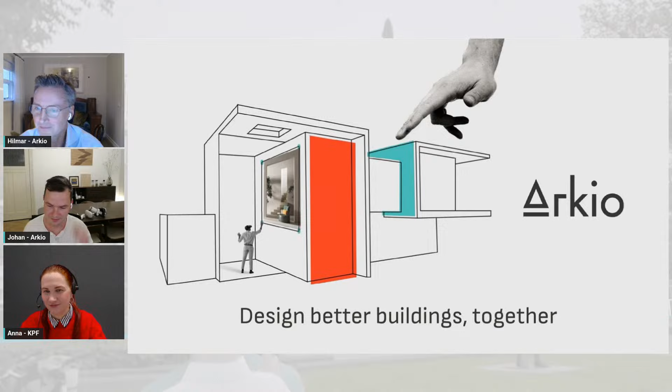Again, we're going to be talking today about some really exciting things, Arkio 2.0, our biggest release yet. Anna will be telling us how KPF is transforming design workflows with Arkio and mixed reality, so she'll have some exciting things to share. Let's wait maybe a few more seconds for more people to join, and then we'll get going.

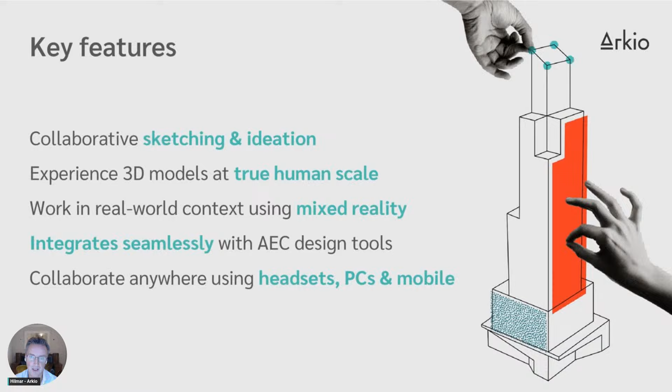The 3 use cases we focus mostly on are design ideation, whether you're sketching like some massing for a new apartment building or just an extension to your house. Design reviews, where you can collaboratively review 3D models and identify issues before they become real problems in the real world. And presentations, internal ones or with clients, when you can guide people around and show them your work.

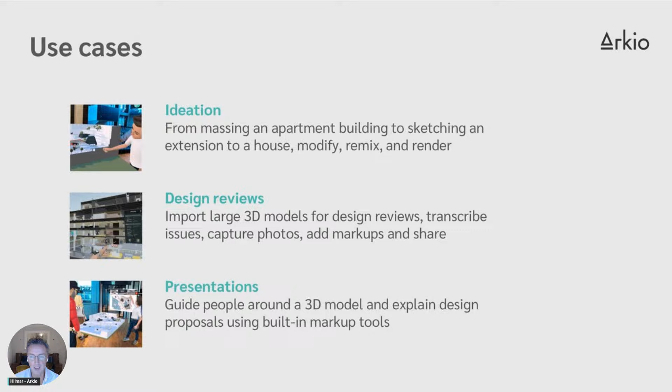Now, the reason why we're building Arkio in the first place is that we think it's super important that people can experience their 3D models, their buildings, before they get built. Instead of identifying things after they get built that could have been better, identifying mistakes that need to be corrected after the fact, and so on. There's no way to experience a 3D model, to experience a building before it gets built, except using VR and XR technologies.

With tools like Arkio, you can also save time and money by having fewer surprises during the design phase and after it. You can make everybody a part of the discussion. Everybody can join. People do not need to spend weeks learning a new tool. It's super easy to be part of the discussion in Arkio.

And what we also do in Arkio is that when you are inside the space, you can both review and ideate and make decisions while you're there together with other people. You don't need to just make notes and then go outside of Arkio and do your edits in another design tool. You can actually do some of the editing and brainstorming inside Arkio itself, which saves also time and money.

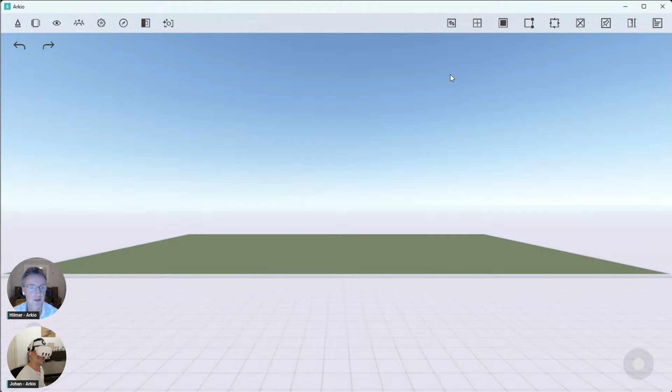There we go. Okay, so as always with live demos, and we say this all the time we do this, anything can go wrong and something probably will, but it's just way more fun to do this live, so that's how we roll.

Now, the first thing I'm going to do here, by the way, this is the PC version of Arkio, and we'll be using the PC application for part of the demo, viewing what Johan is doing in VR through the PC application, and then we'll switch to VR to see Johan's point of view. It's really important to note that everything you can do in Arkio, you can do across all of these applications. So I can be using a headset, or a PC, Mac, iPad, or phone.

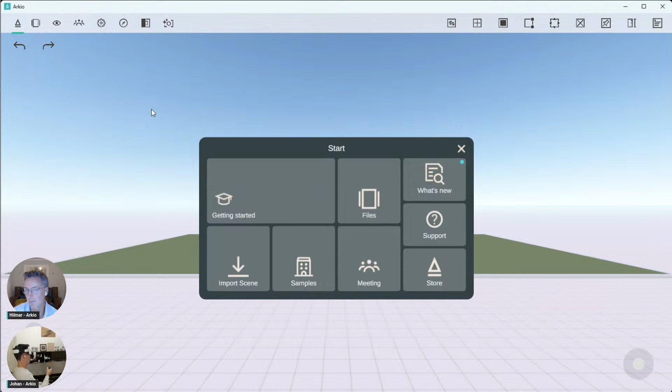Now, the first thing I'm going to do is join Johan's meeting. So are you ready, Johan? Yep. Okay, so let me connect. And there's Johan. So Johan, where are you at? Hello there. Yeah, welcome. So we're currently in Rotterdam.

So what I did here is I loaded the map of Rotterdam and turned on the 3D buildings. This is a feature inside Arkio some of you might be familiar with. You can also import your own 3D models from other design tools and basically make a starting scene. So right now we have a plot over here which we want to make a new tower design. Let me just get started with that.

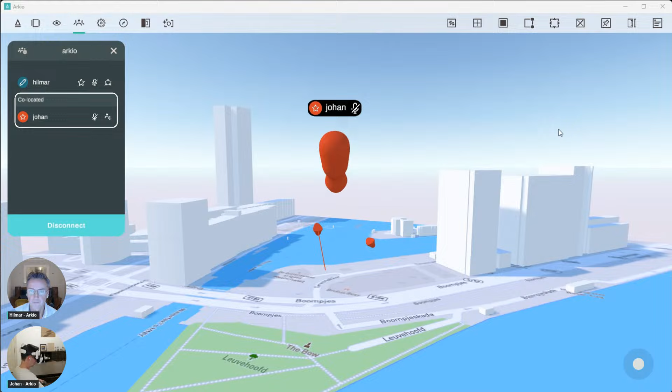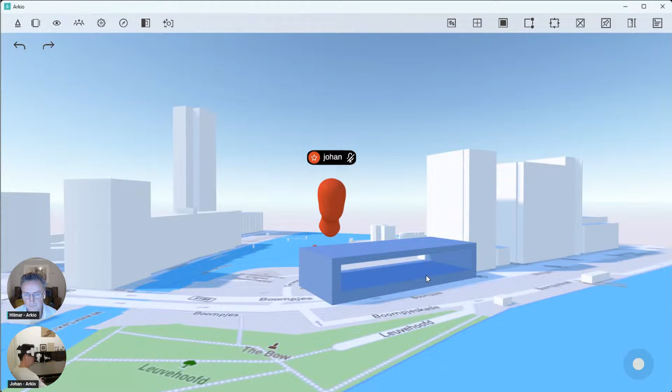I'm just going to make a little volume over here, rotating it a bit, carving, opening a void, and making a little inside place with it. So as Johan is working, I can of course navigate around the scene and look at what he's doing as he's working.

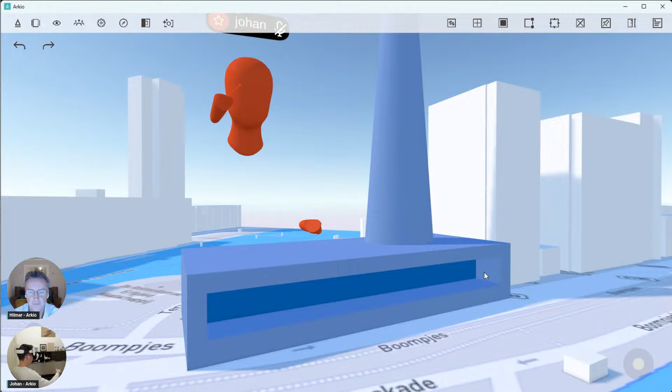So I'm going to be using some of Arkio's new shapes. We added some shapes in 2.0 that give you more design freedom. So let's just add maybe a cone over here, and a cylinder, and maybe some round object instead. What do you think of these towers?

Yeah, I think that looks a bit funky. Maybe let's make something a little more traditional, since we're going to do some kind of hotel building. Okay, let's just throw all this stuff away and go for a more traditional approach, just using some of the volumes.

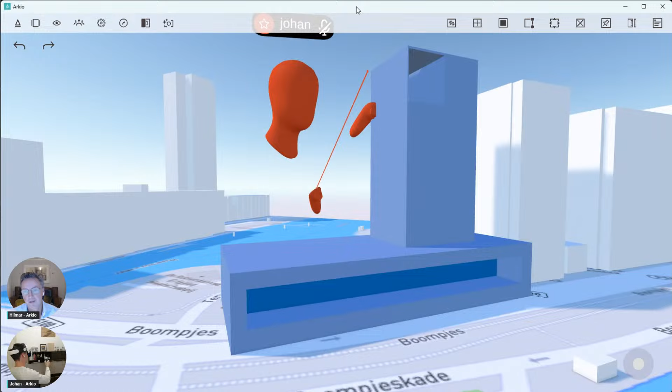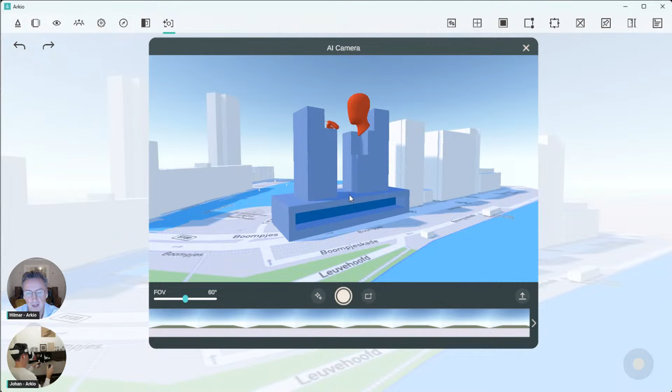So as Johan is working, I'm going to show you the AI rendering capabilities of Arkio. I'm going to open my AI camera, and when I do that, I can frame the shot in any way that I want. I can turn on my AI render settings.

And then you see a few options. So I can choose the render style. It can be a regular render, or sketch, or a model, or a marker drawing. It can be an exterior or interior one. I can select the likeness if I want to create multiple random images and so on.

So I'm going to type a prompt. Let's say modern hotel towers. And I'm going to frame my shot. Maybe let's try this and fire off a few AI image generations.

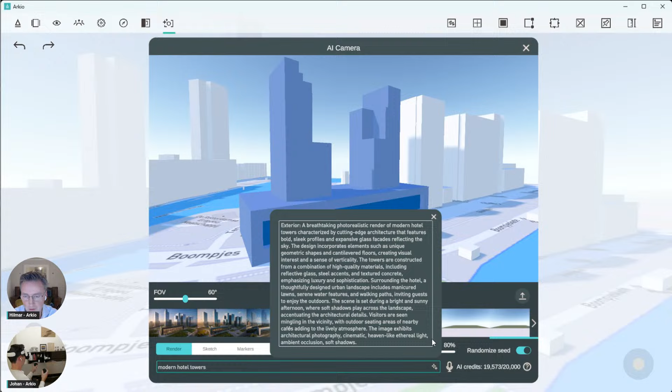Now what's happening is we're taking the prompt I wrote, modern hotel towers, and we have an AI agent working in the background that's enhancing the prompt and coming up with a more detailed prompt, which you can now see here. If I'd like, I can go in and edit this more detailed prompt to make it more specific to what I want to see. And then you can see in the background how the AI renders came back.

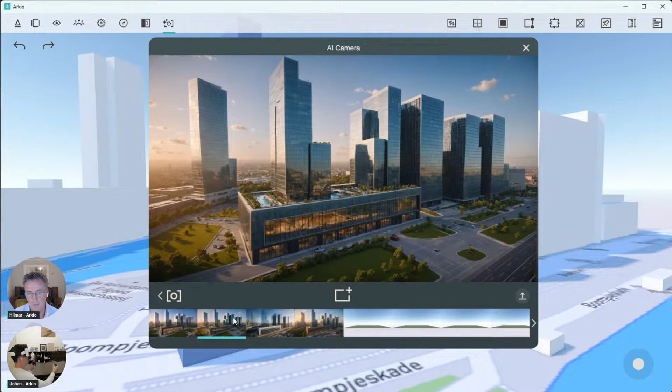So you can get these kind of beautiful AI renders from Arkio, from the PC application, or even from inside VR itself. In this case, we had the likeness set to around 80%. The idea is not to try to create photorealistic renderings of your final scene.

There are other tools to do that. We see the AI rendering capabilities more as a brainstorming and ideation partner that you can use to explore design options, materiality, and so on.

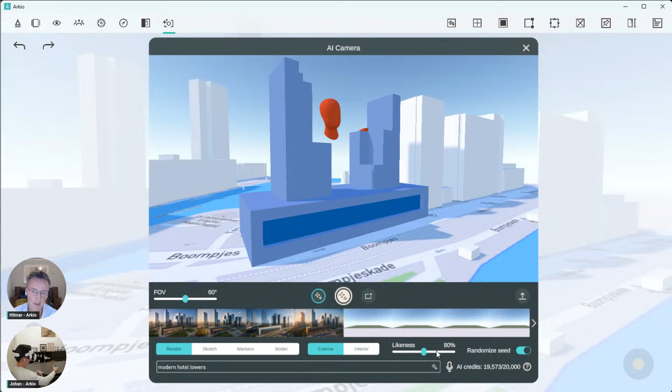Now, the interesting thing about what I have here is I can then take one of these images, and using a new feature which we call frames, I can place it inside the scene itself to share it with other people. Let me just add this frame here.

So now you can see that this render is actually inside the 3D space, and Johan can see the render that I created. I can create multiple of these renders and place them anywhere I want in the scene, and they will all be shared with other people.

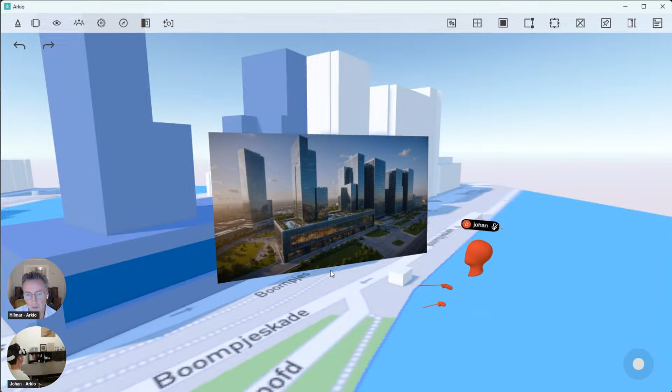So what do you think, Johan? This looks pretty nice. I like the volume that's over here. Let me just sketch something on top of it.

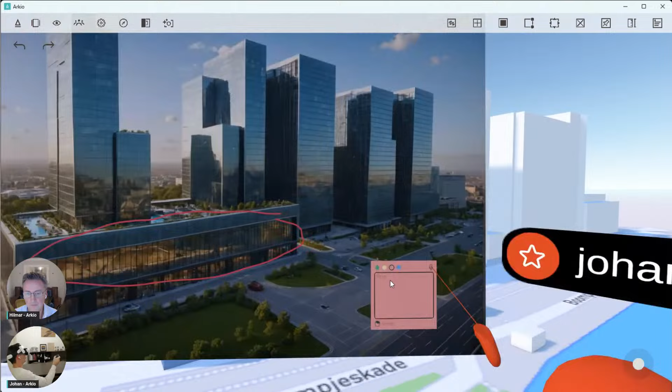Another thing that we added in 2.0 is the ability to transcribe notes. So let me just add a note on this and color it red. Let's use this materiality for these towers. I'm using my voice transcription to add the text to the note.

Later, this voice or these transcriptions can also be exported as issues. We'll talk about that a bit. I'll just assign myself as well to the note.

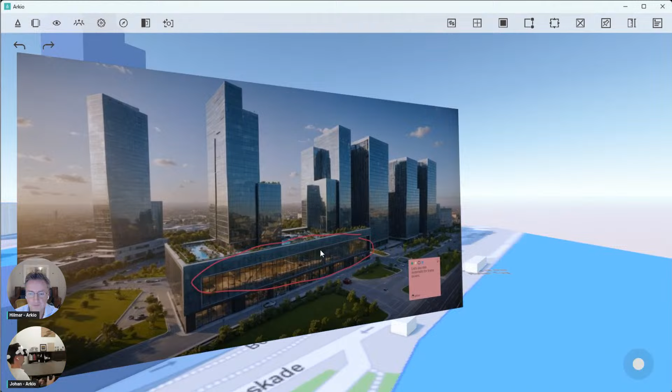Very cool. And I can obviously just navigate around here. I can even say that, well, I don't think this is super important, so let's make it a medium priority note.

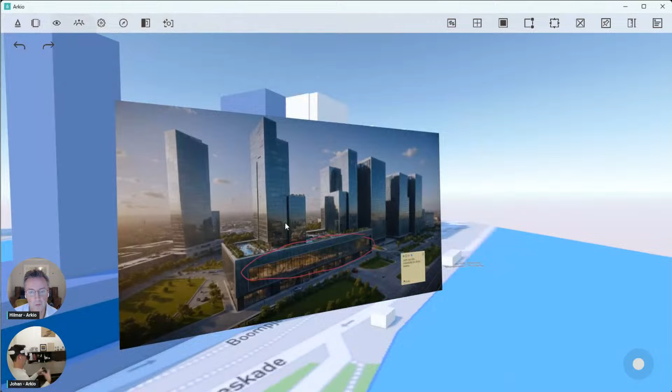But why don't you, Johan, remove this blocky massing and place a real 3D model on the side instead? Let's do that. Let's just throw this one away.

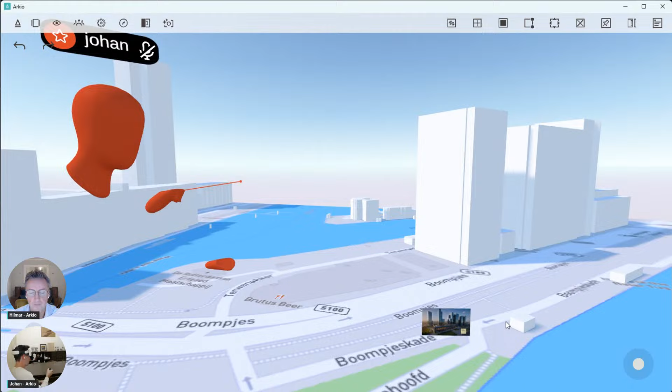I right now have some files prepared, like I have an Archicad file. This is one of the plugins we added in 2.0. This is a pretty big file.

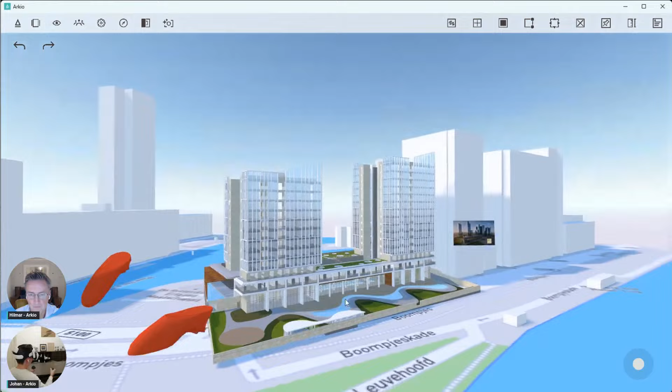And as you can see, I can move it around using my hand. I just pick it up and move it like a physical model, and I'm aligning it to the scene and pinning it in place so it doesn't accidentally move.

I can also load models from Rhino, Revit, SketchUp, Unity, BIM 360, and all the other plugins and file formats that we support. This could be a good base to model on.

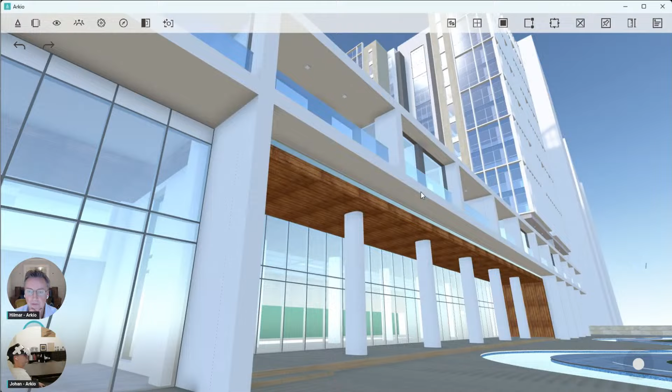Very cool. So let me, for the fun of it, jump here to the ground, maybe create an AI render from here. I'll use the same prompt as before.

So I'll frame it like this and create some AI renders right here. It's going to do the same thing, use the same prompt as before, though I could have changed the prompt if I wanted to.

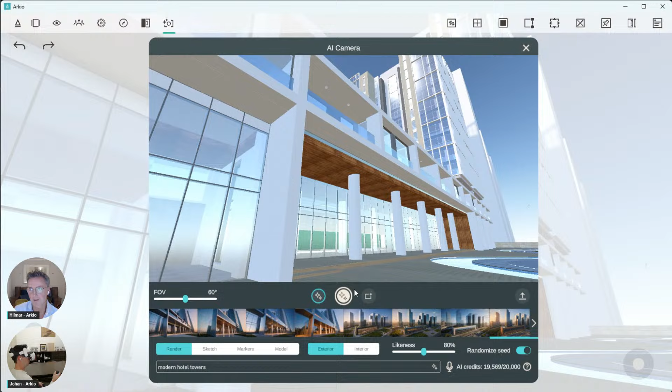I can also, if I see an image that I really like, uncheck the randomize seed button to create different shots from different viewpoints using the same approximate style. So these are some of the images that get created from this viewpoint.

But Johan, what are you up to over here? I'm adding a model that came from our SketchUp plugin, and this model shows that we now support layers.

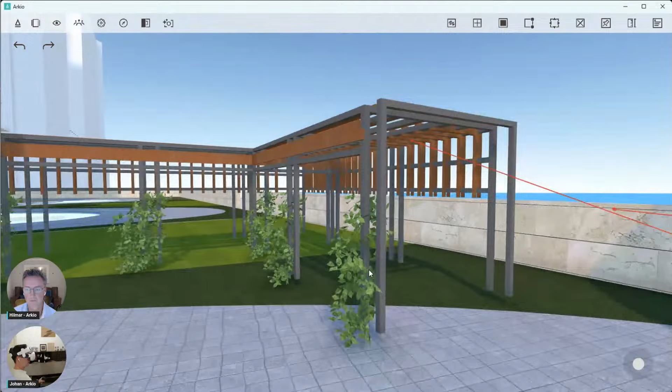Let me just open my layers panel on my end, and I'm going to turn on only one of the options. There's three options I want to show you, Hilmar, like this one, this one, and this one. Which one do you like most?

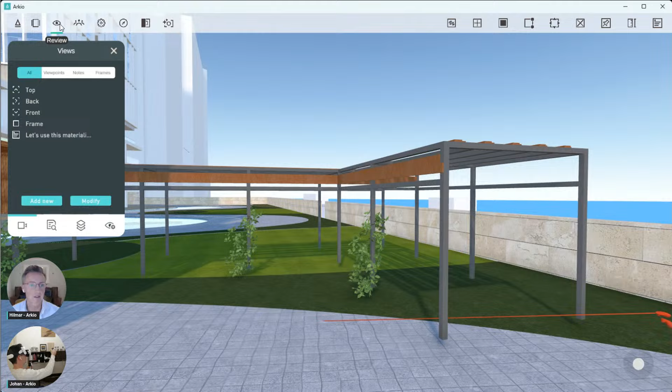Let me see. I'll actually open the layers on my end as well, so I can go into the layer UI, same as Johan has. Here you can see both of the models we have: the Archicad model and the SketchUp one.

Maybe I will turn this one off, and let's use this one here. How about that? It's great. Maybe you can add a note so we don't forget.

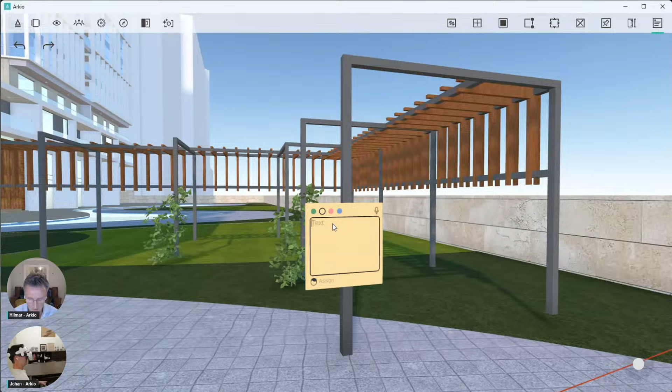Sure, I'll add a note right here. I'll say let's use this one, assign it to myself, and make it low priority.

Very good. So we've shown you a lot of things already: the AI renders, frames, notes with voice dictation, priorities, and ownership.

Layers have been a heavily requested feature. It really opens up the possibility for you to do all kinds of design optioning inside Arkio.

But we're going to switch to Johan's headset view. Are you ready? Yeah, okay, go for it.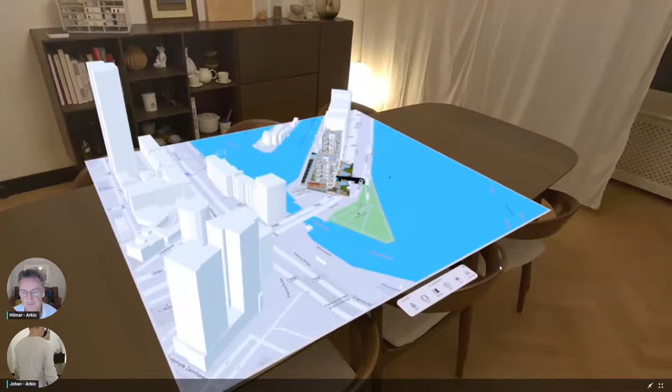So right now we see the model in mixed reality, and mixed reality has the advantage that you can put your 3D models in any location. Right now I put it on top of my table, and if I would be in this space with a couple of other people with headsets, everyone would be able to co-locate and see that model in the same position.

When I look closer at that model, I see that more detail appears, and it is our large rendering technology at work. I can basically move to any side of the model, see little small Hilmar in there already exploring the scene.

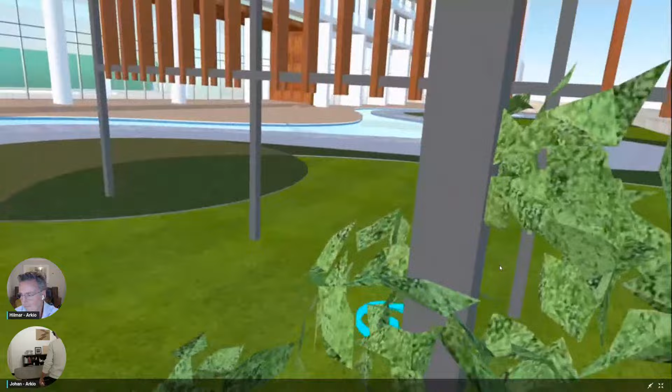If I'm together with other people and I'm co-located, if I jump inside of the model, I can also use that to be fully immersed, and everyone else in that meeting can also be gathered to me using the wristband.

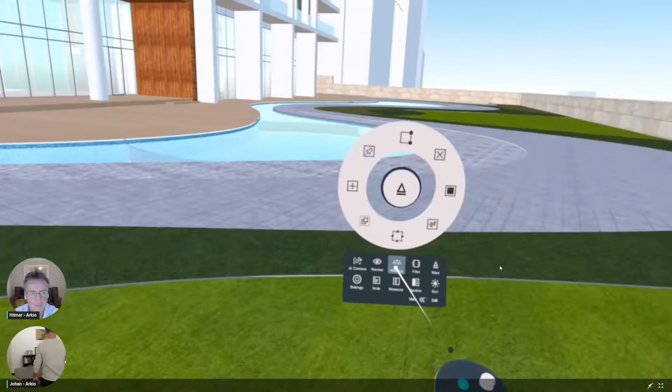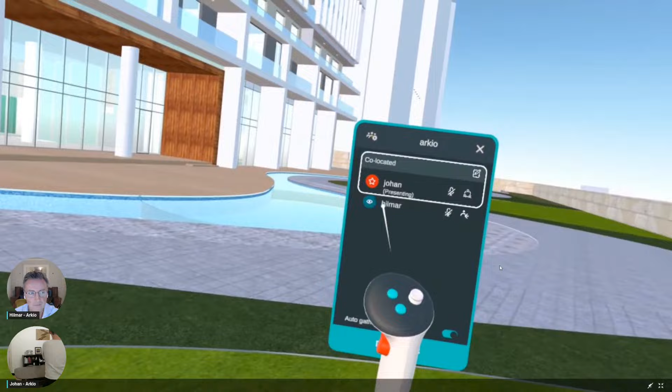I can also use new presentation controls. Right now I'm the host of the meeting, I'm co-located, but we have new presentation controls now where you can turn on presentation mode. This basically mutes all the other users, makes the editors viewers in the meeting, so you can present something, and it auto gathers people as well.

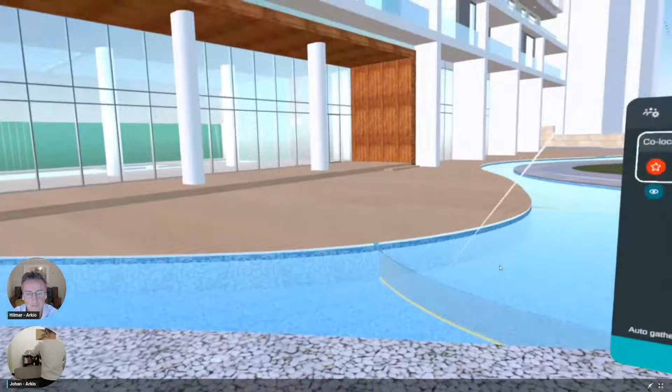This is another setting on your wristband. So if I teleport somewhere and I look behind me, Hilmar actually followed me right there. I can turn the gather position also to be in the front of me.

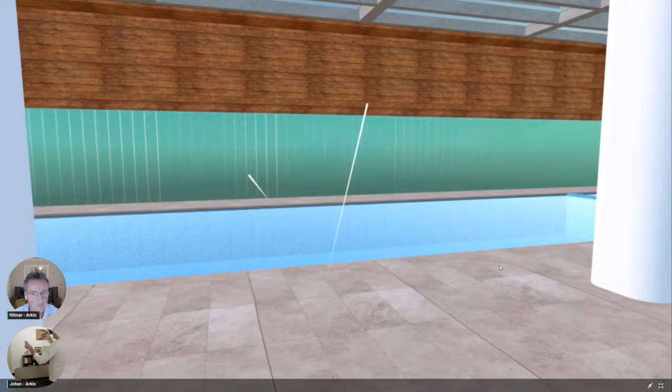So if I go inside here, for example, in the swimming pool, wait a second, Hilmar is appearing right in front of me. If you would be having up to 24 people, you would be all around you, and you can have live presentations through your design.

If I jump back up to the large scale, the model locks in place to that table again, and Hilmar would appear right over there.

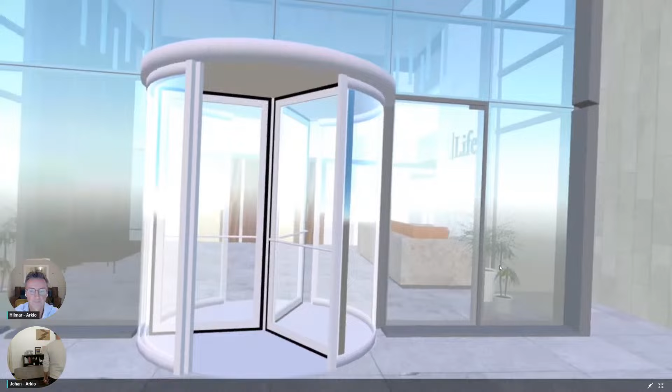Let me just go into this area over here and go into a lobby, all the way here. I'm opening my meeting panel again and turning off the presentation mode so Hilmar can move around freely again and edit.

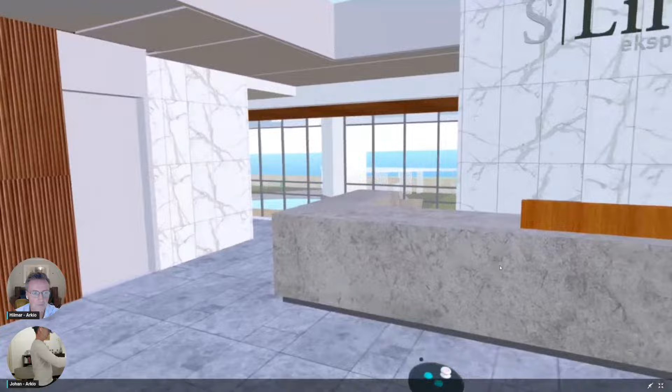So I'm seeing something that is not working that well here, like this reception desk that goes into the space a lot, and it needs a bit more clearance.

So I'm gonna put a note on that reception, make a little note like here. I want to align it to somewhere there. And let's put that note so we don't forget: make reception smaller.

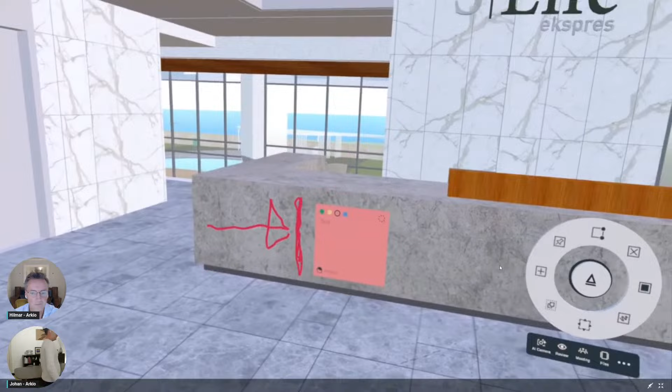As we wait to let it transcribe, that's basically set in here. If I teleport outside and have a look at the model here, this also shows an issue. We have a little niche in the building here that is not used that well.

I'm going to make a screenshot of that one and put it in the scene. So I'll be using the camera mode, and I'm going to be auto-framing the pictures I'm making in the scene. That basically means that whenever I do a snapshot, it directly puts that image in the scene for everyone to see. And me and Hilmar can then see this picture and work on it together.

So if I see, for example, this little thing over here, I want to point that out to Hilmar, and we can discuss this together, again adding a note to make it more obvious what the actual issue is: fill in this clearance in this space. Just making some weird thing up.

This one can also be assigned to someone, so we can just, after we export this out, use this in our other issue management tool.

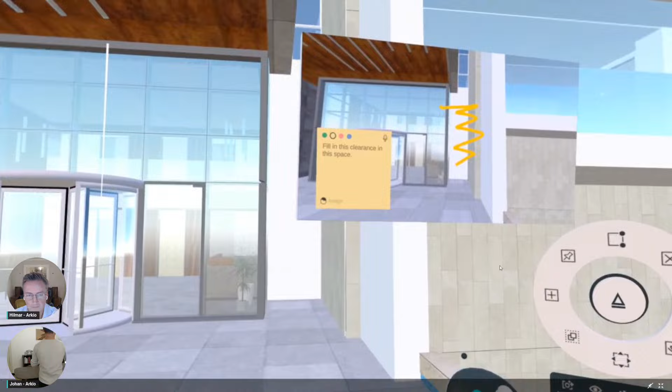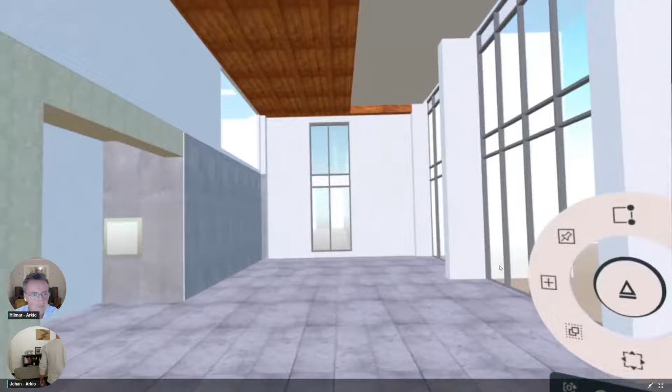There's one more area I want to go to with Hilmar, so I'm just going to teleport there to this big empty lobby, and we have some AI. We let AI generate some of these images already, so I'm just going to be using some of these.

So I have this render that I made, which I prompted using marble and wood. It's basically this space, and I want to put it in the scene for Hilmar and me to look at.

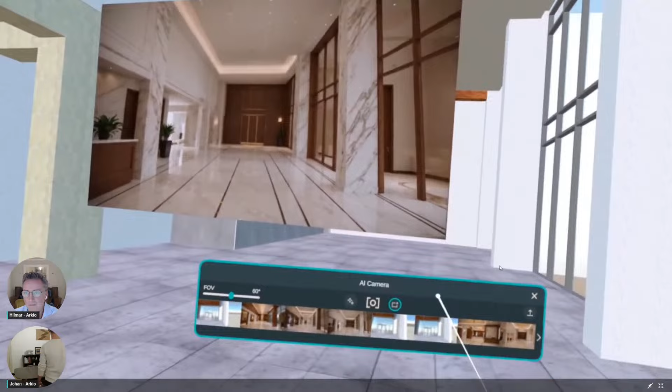What do you think of this materialization, Hilmar? I think it looks pretty cool, but maybe you should add some kind of reception desk over here. I think we should, and I think we should use that material.

So again, I'll add a note: use this materialization, and add a new reception desk. Just assign that one to myself.

And I have an idea for this reception already, so let me just jump right here. So one of the advantages of using VR is that you understand scale and human proportions a lot better. So if I'm making a reception space in a tight place like this, I can really use the advantage of VR to make this space using Arkio's volumes.

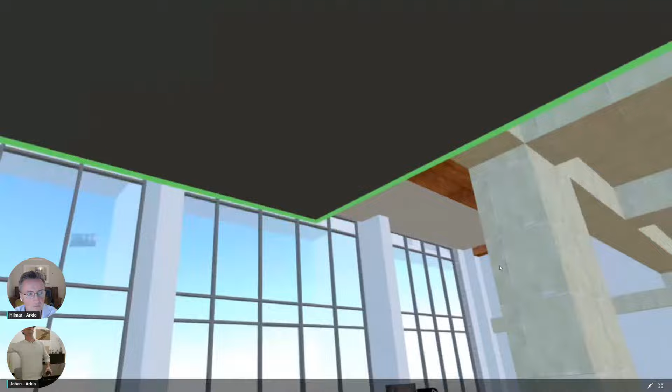Let me just stretch this out a bit. So I'm really feeling like how this would feel to have this reception over here. And if I'm going to add a volume here in the ceiling, I can really feel the scale that it would be like to be in this reception.

If I look back at my design, I can use these volumes and export them back out into Revit or Archicad. I'm going to just add another snapshot of this design. Let me just go through.

Okay, I have something already. Let's just throw that one in the scene. And this then would be visible for Hilmar as well. And we can add a note. Very good.

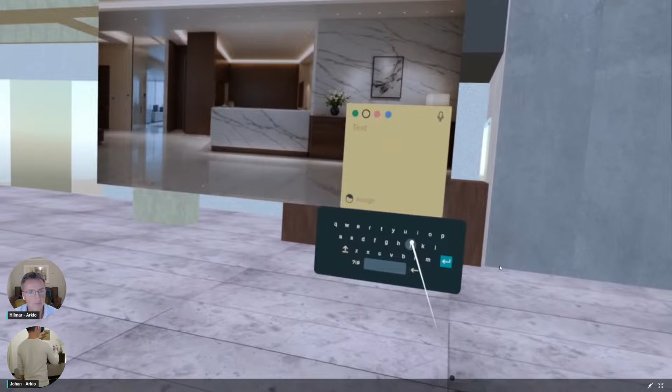Great, thanks, Johan. So yep, let's switch over to my view here again. So I will do that.

Okay, so this is back to the PC client. So here you can see the frame that Johan just added. You can see the note that he created. I can go and change, obviously, all of these things as well.

Now, so far we've been working together in a meeting. But one of the advantages of Arkio is that you don't have to be connected to the cloud to do any of this. So I already have on my device, I have these models, I have all of these frames and these issues. So I'm just going to disconnect from the meeting. Everything still works for me.

So this means that if you do need to do any kind of a demo, whether it's with a PC or with a headset in a place where you have spotty connectivity, you can still do that as long as you kind of load your models beforehand.

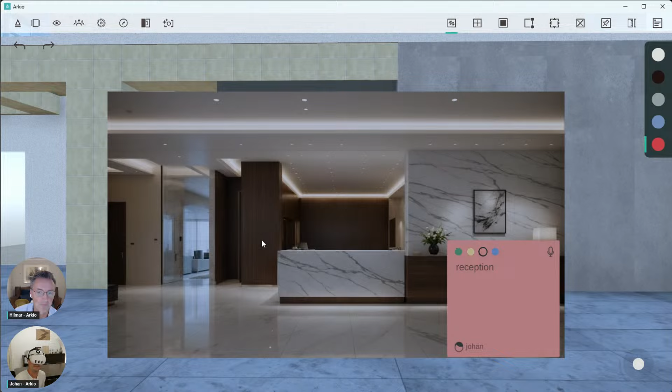Now, since we're here in the PC application, I wanted to show you a few things in general, what we've done in 2.0 with the non-VR applications, as we call them. So we made changes across all of the apps we have across PC, Mac, tablet, and phone. We have a new tool ribbon here at the very top. We've kind of simplified and cleaned up the look of the app.

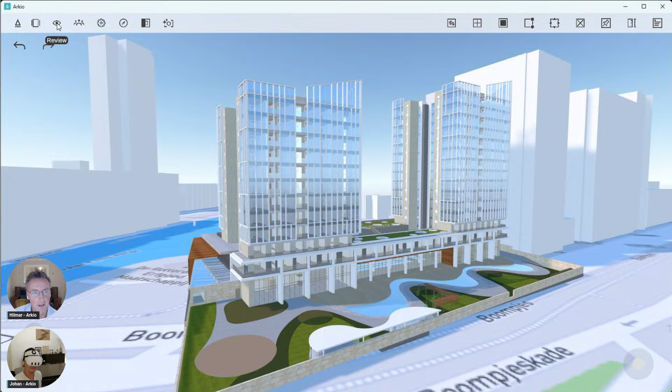And if I go into my review UI, you can see here that I have in a single place all of my viewpoints, all of the notes that have been created, and all of the frames that have been created. I can also go into a view showing only the notes that I have, and I can start to jump through them. So here are the ones that we created before.

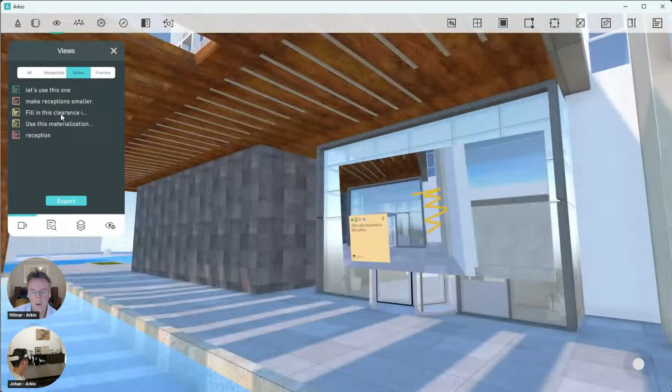So make the reception smaller, fill in this clearance, use this materialization, and then there's the reception. And you can see if I start to modify this, let's say I want to make this a medium priority, it changes here in the list as well. If I change the text, it changes the text as well.

Anybody that joins me in the scene, whether that's in a meeting or if I share the scene with other people, they'll be able to see all of these same things. And the same goes with the frames. I can jump to the frames and I can see them in front of me.

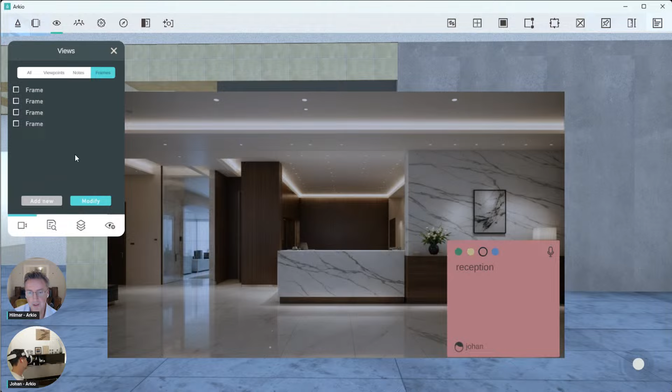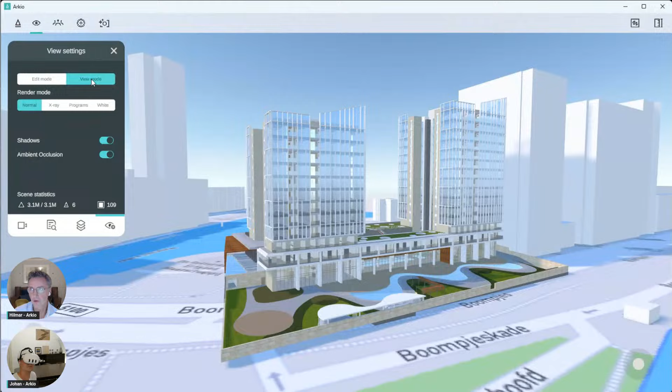Now, there are other things that are interesting to note in this review panel if I go into my review settings. So first of all, we have a new feature in Arkio where you can go between edit and view mode. So with view mode, you can toggle that to make sure that nothing can happen to the scene itself.

It basically removes the tools so you can hand your headset or your device to somebody without being at risk of them modifying the scene. Now, I can also turn on other things like shadows on and off, ambient occlusion. We had different rendering modes.

What's also interesting here in this view is you can see in the statistics from the scene that this scene has 3 million triangles. Now, a device like the Quest typically should only be able to render 1 million triangles. But with Arkio, you can go up to 20 or even more, 20 million triangles. And if you have multiple models like this, 3, 4, 5, 6 million triangles, you can even combine multiple models in one single scene, and we still render it for you.

So let's actually go back to Johan briefly to see what he's up to.

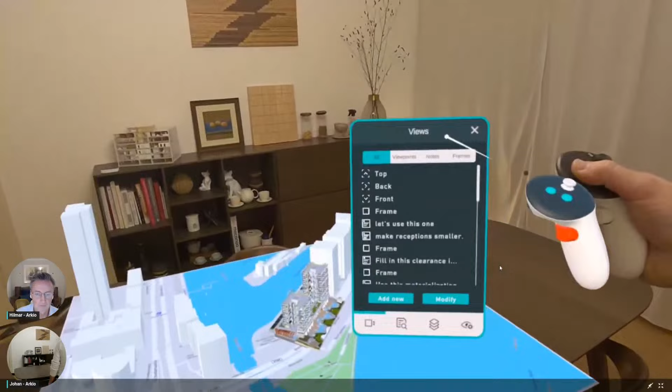Okay, so I have the same overview that Hilmar just showed, going through the different notes here to get a sense that we can go to these meetings together. So if you prepared something in single user, you can just do this together, or send someone an Arkio file.

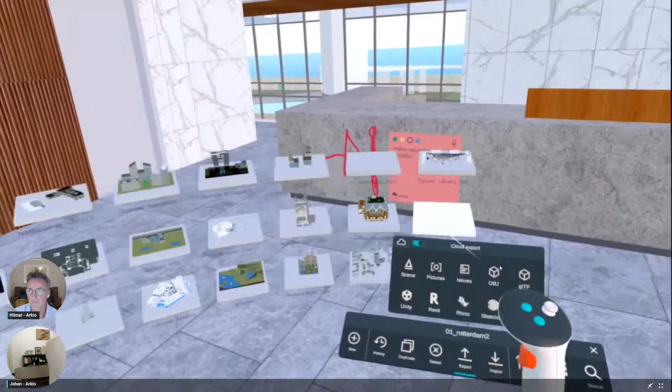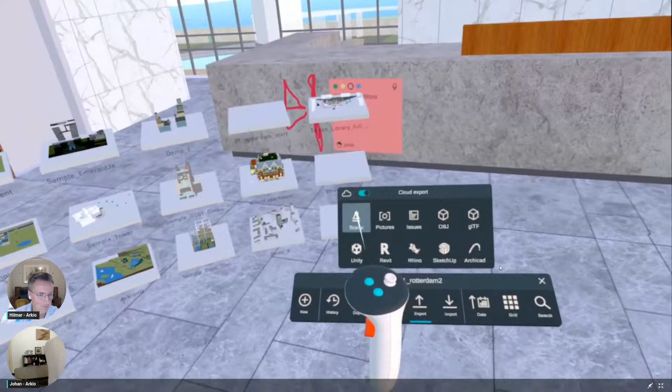You can export your issues from this panel, which will open the new file browser of Arkio 2.0. This file browser shows all of the models you have available locally, and it shows my export settings and that I'm connected to the Arkio cloud. With the cloud enabled, I can export everything to the cloud, which is our central hub to connect all your devices together, getting downloads from your PC and uploads from plugins to the headset.

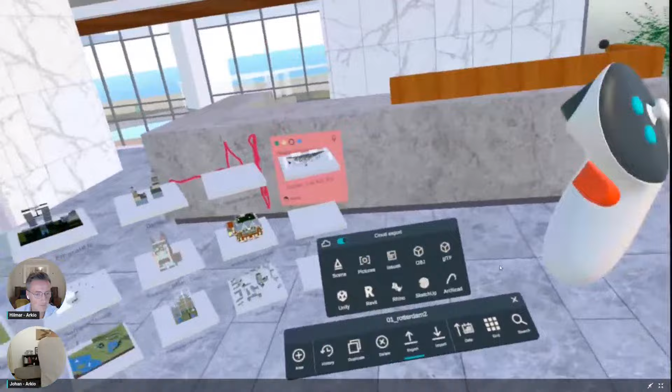Right now I'm in this space, and I'm going to export this scene so Hilmar is able to show it on the PC. We're no longer in the meeting, by the way, so this can be a good way to show or share things with people without having an Arkio meeting. I can also export the issues themselves.

This will make a screenshot of the notes and also include the text that we put in the notes, the priority, and all of the metadata.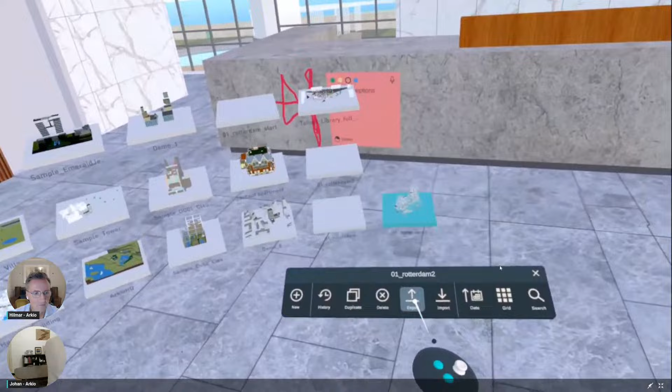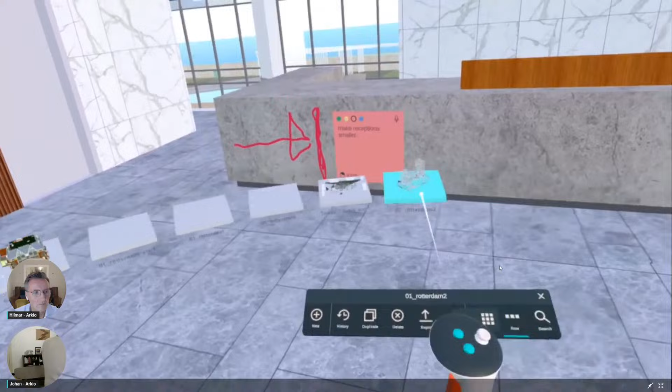The file browser itself got a really big overhaul for 2.0, and now we have much more models that we can show. We show previews of the imported geometries in your models, and you can switch between row mode, basically the old way of going through scenes, and grid mode, which allows a lot of scenes. You can also search files.

So using that, for example, I have a school project in here. I just type the characters I need, and it will filter out the models in your scene. I think this is a good time to go back to you, Hilmar.

Sure, so we're going to end with showing the Arkio Cloud portal. To access it, you can simply go to our website, arkio.is, and there's a cloud button in the top right corner.

The cloud, like Johan said, is a great way for you to manage your imports and exports in terms of 3D models, scenes, or issues. It's really simple to create a group, and when you have a group, you can connect all of your devices to that single group, so everything flows between these devices automatically.

Johan just exported the issues, so we're going to go into the issues list. Here we have the list of issues we just created, all the notes we added together with images. It shows the description, the assignment, priority, and when this got created. This I can share with anybody.

So if I copy this URL for the issues list, I'm just going to paste this into the event chat. You can even try for yourself, open a new browser and try to open that URL, and you'll see the same issues. And the same goes for the scenes.

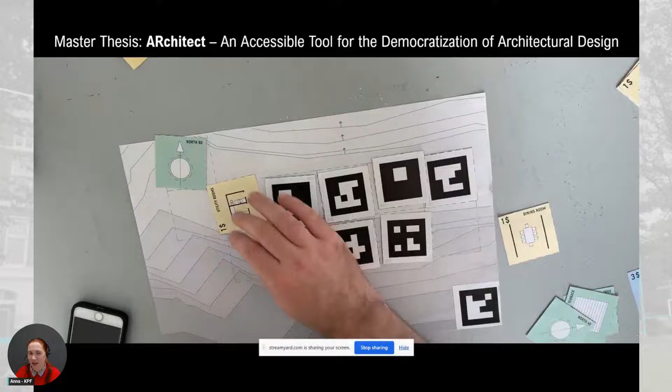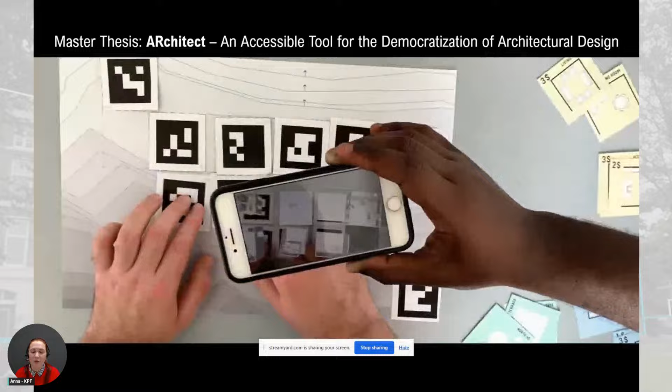So the project called ARchitect is a multisensory game that explores the educational potential of learning games and their impact on user engagement in the co-design of homes. Architect uses augmented reality as part of the game to convert play cards, as you can see on the screen, and the play cards have Aruco codes on the back side, into 3D models in real time. In my concept, it was meant to have design evaluation integrated. By encouraging learning through play, the game offers an alternative approach to design education, empowering non-experts to shape their future urban environments on a micro scale.

So after graduating, I received an offer from KPF New York. After one year, I transitioned to the London office, where I moved from a designer role to a visualization specialist. I work on a variety of initiatives, including educating architects on real-time rendering software, implementing a variety of workflows, and promoting AI workflows in architectural practice.

I also conduct research in extended reality for architecture, which is my personal passion.

KPF is a global architecture firm recognized for our innovative, sustainable design solutions. At KPF, we believe in the power of architecture to transform cities. We do this through crafted details, through attention to context, and of course through innovations. Our diverse team delivers projects that shape skylines and enrich communities spanning commercial, residential, cultural, and civic sectors.

With the project One North Quay, I have always been eager to find unique applications for mixed reality and collaborative features that Arkio provides. This project, One North Quay in Canary Wharf, London, became the ideal case study. The innovative design of the building itself introduces a new approach to life sciences by creating a vertical lab campus rather than typical low-rise buildings. Currently in the construction phase, the project is expected to be completed by July 2028.

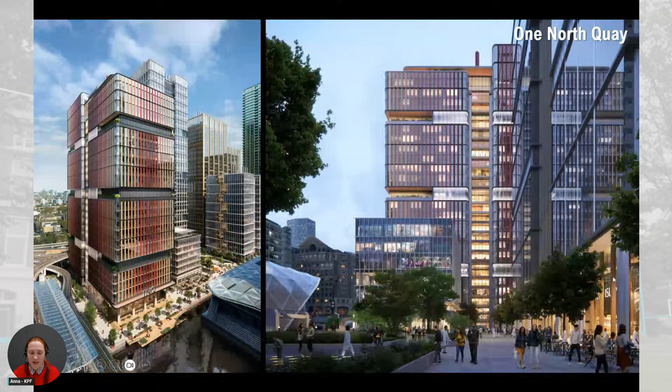The tower presented a unique challenge for our mixed reality case study, not only because of its impressive size, it's 136 meters and 23 floors, and its prime location, but also due to the complexity of the Revit model, which requires extensive optimization to run smoothly on a mobile device, especially in the MetaQuest headset.

However, the workflow with Arkio is quite straightforward. I began by identifying the best locations around the construction site to preview the model in mixed reality, ultimately selecting two spots, DLR Poplar Station and West India Quay. Both are elevated, which required me to use the context models of the stations and surrounding buildings to accurately position the North Quay project on the site.

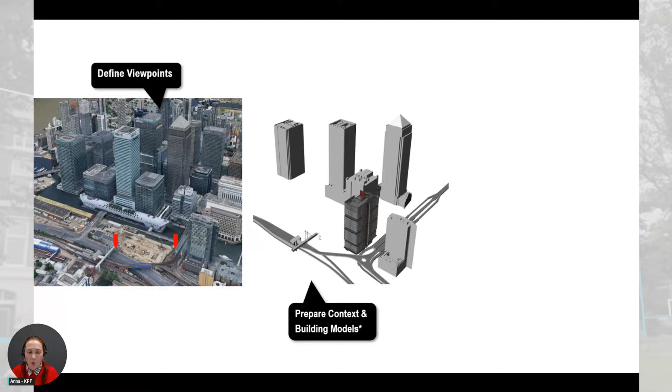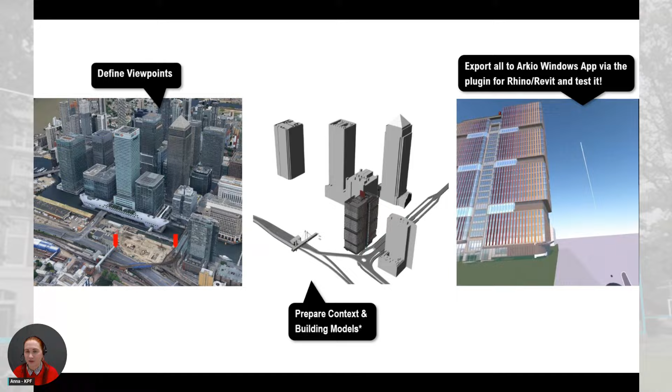Once the models were placed and materials assigned, I exported everything to the Arkio environment directly from Revit with a single click. Don't forget to preload your model onto the headset, open it and test how the building appears from both viewpoints in advance, just to protect yourself from going back and forth from site visits.

You can use Arkio with or without Wi-Fi, as the headset will store the most recently updated model for easy access when needed. On site, you should physically position yourself in alignment with both the context model and the actual environment. After launching Arkio, you adjust your location in mixed reality, apply pass-through, and align context buildings with their real-world twins, let's say. Once aligned, you can apply a transparent material to fully immerse yourself in the experience.

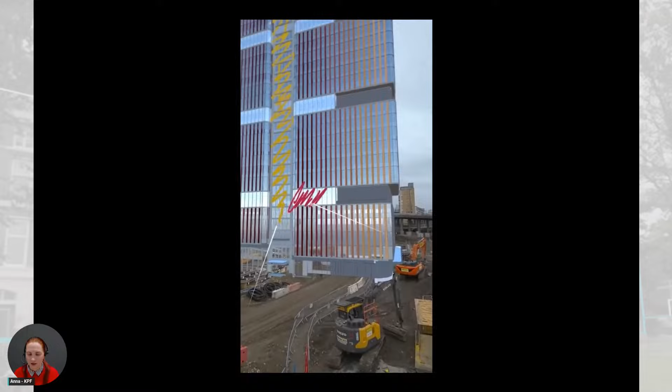While reviewing the building, you can make changes in real time, record video, or collaborate with your colleagues. For example, I tested the XR Sketching Pen by MX Ink Logitech, and it allowed me to use a familiar tool to mark up the project and make a variety of adjustments, from changing textures to adding new building elements.

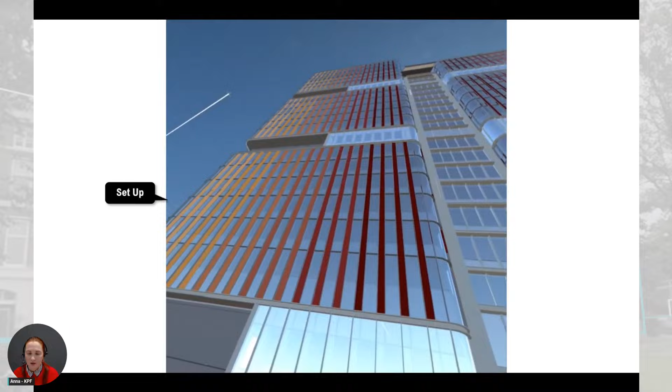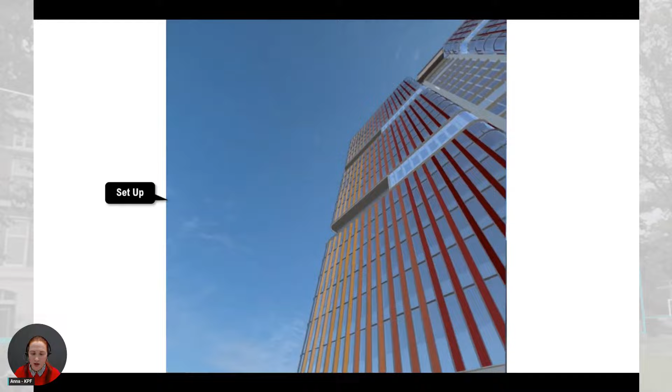So a single model allows you to review your project from multiple viewpoints using the same workflow. You can get to the next viewpoint, like this one from West India Quay, enable pass-through, and teleport yourself correctly in the model. After aligning your location and applying the transparent material on the context model, you cannot just see the model in the static view, you can also walk in the headset. But don't be afraid, you will not bump into the wall or hurt anyone around you. You see here, it becomes transparent once you start moving.

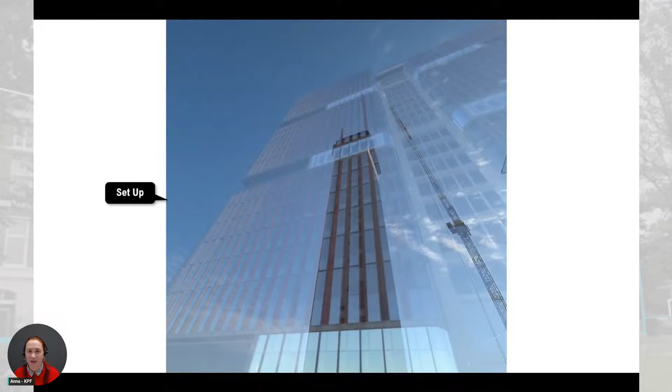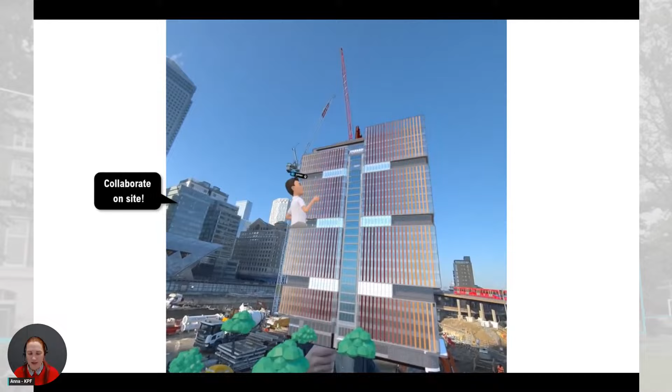But if you have Wi-Fi access on site, you should conduct a real-time meeting by joining from the headset. You can guide your colleagues or clients through the model experience by bringing all the users to the area of interest. Additionally, you can adjust the viewing mode, allowing participants to either edit the model or follow your lead in presentation mode. The collaborative feature is extremely valuable for us, and it enables users to participate and discuss real-time changes with actual context. It also allows people from all around the world, as Hilmar just showed with Johan, to connect in the immersive environment, offering an engaging alternative to traditional Zoom presentations.

So I also like that in Arkio, you can access the project at multiple scales. That's it for me.

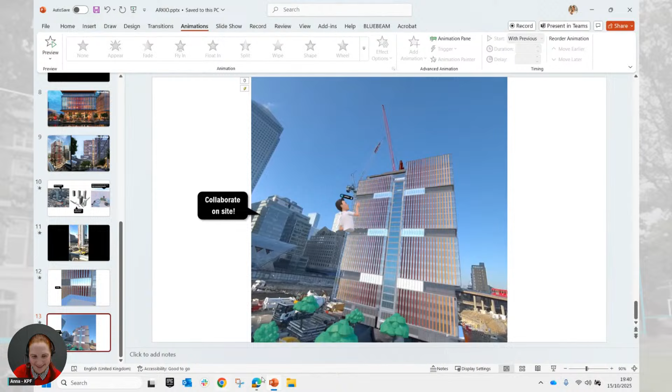Really cool. Perfect. Yeah. Thanks, Anna. That was amazing. It's so fascinating to see how you're using Arkio and mixed reality. It's mind-blowing. Thank you. It's a lot of fun.